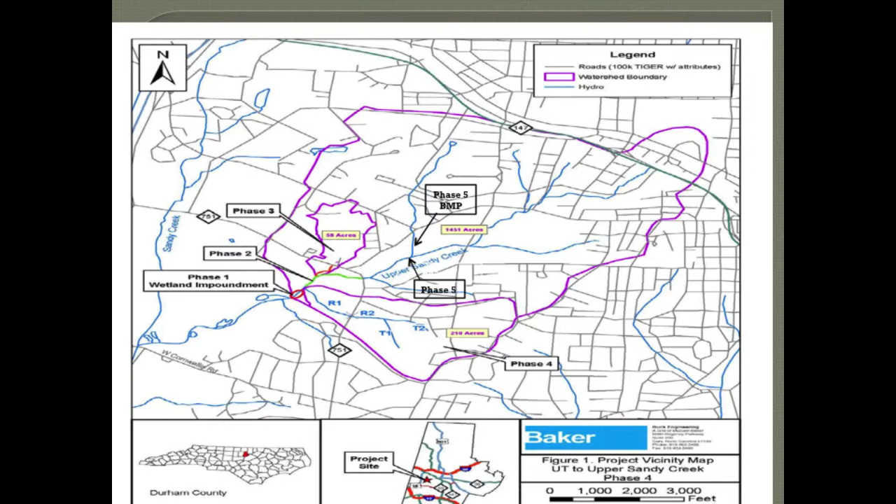Here's just an overview of the 5 phases quickly, and again, I won't go into them in depth, but phase 1 consists of some stream restoration. Phase 2 is going to be our wetland pond. Phase 3 is the wetland cells. Phase 4 has 2 reaches to it, Reach 1 and Reach 2, and both of those are stream restoration, with Reach 1 having a special anabranching approach to it, which you'll learn about later, of course. And then Phase 5, which we have the design and permitting, and we're waiting on construction funds.

Here is a shot of the head of Sandy Creek, and you would think by the size of this we have a lot of water coming through there. Now, Kurt, have you ever seen those flow full by any chance, or a hurricane that flowed full? Well, you can imagine the amount of water that's coming out through there. These guys wouldn't be here if that was the case, but anyway, that's a lot of water, and most of it is coming from the city of Durham, and not necessarily Duke University-owned property.

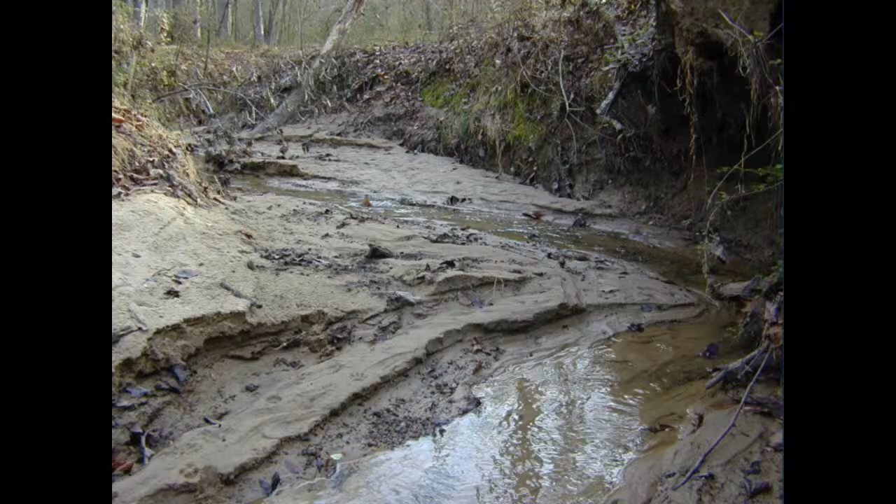Here you see a pre-construction. We have a lot of deposition of sand. You see the stream trying to heal itself, but incised channels, and this is probably a lesser of what we've seen in the worst case scenario on this project.

Phase 1, like I said, was stream restoration, and also they restored some wetland. Here's a list of some of the partners and the cost. You can see the cost for phase 1 and phase 2, and I'll talk about phase 2 in just a minute. We had some macroinvertebrate study completed. USDA Natural Resources Conservation Service provided some funding for some plant material, and then of course monitoring.

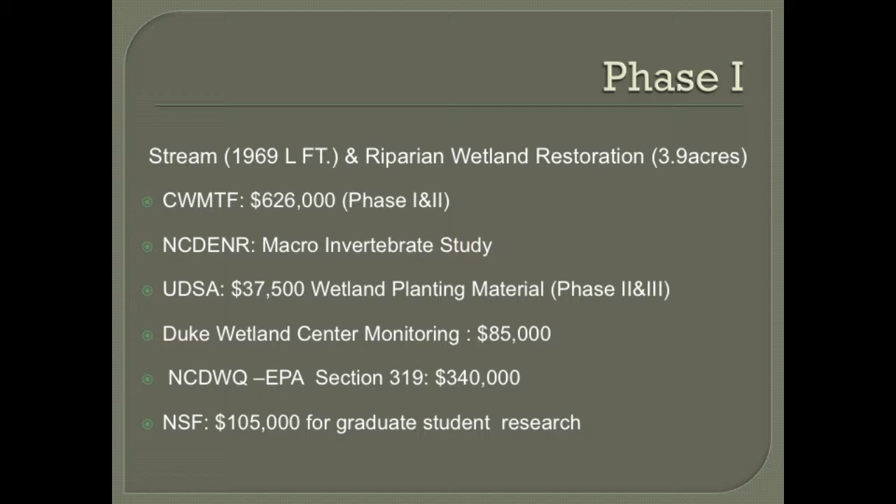You'll find on this particular project, these are actual data numbers that they're going to give you during this, and I think those are worth a lot in terms of taking something away from this course. But then you also see some research for graduate students, and that's something Curtis does well, is he plugs the students into the project to where they have ownership of it.

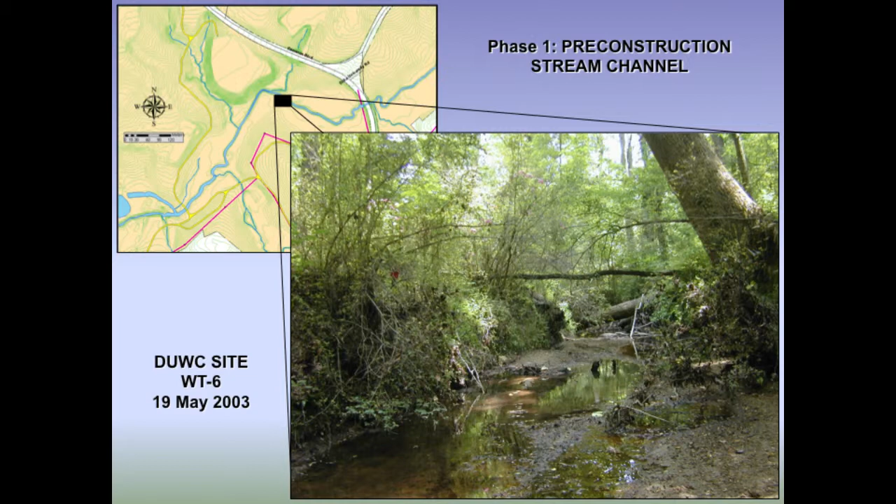Phase 1, here's the location of it again, just off of 751, for those of you familiar with Durham. Here's more of a sight of what we're used to seeing throughout, incised, no sinuosity, but there's just a good example of what we've seen pre-construction.

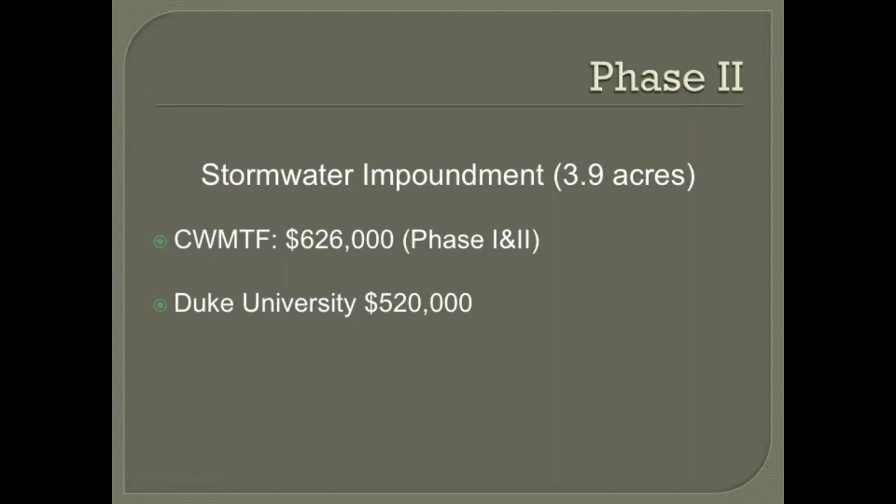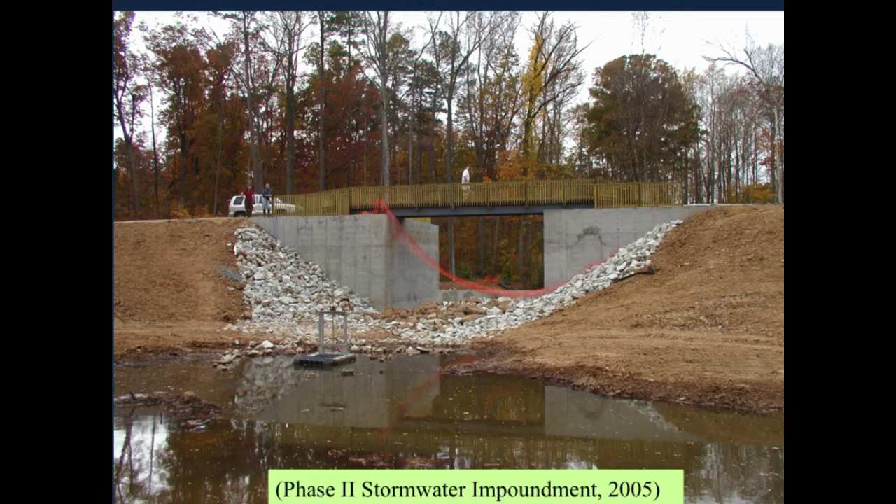Phase 2 is a stormwater impoundment pond. There's some cost of it. It's about 3.9 acres, and they have the ability to raise and lower the water level. The thing I see that is utilizing it, you see a lot of wildlife out there. You see a lot of plant materials that you wouldn't normally see. But most of all, we hear a lot of good comments from the people who use it as a path. You know, they jog right across this trail and/or the bridge, and they utilize that to its fullest.

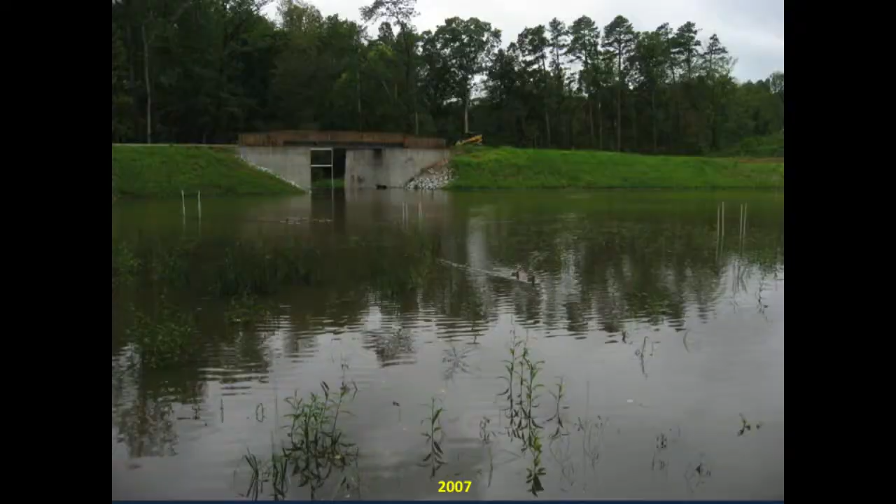Here's another view, and I think you have some ducks there in the front. These pictures don't do them justice, and of course when we go out there, you'll see what I'm talking about.

Phase 3 is the 6 offline cells that were installed. And this is actually capturing the water from Wallace Wade Stadium and Cameron Indoor, where they play their sports over there, and treating it with different vegetations in the cells. Division of Water Resources was a nice sponsor in this project, and then of course Duke University. And we had money left over again from the USDA for the plant material.

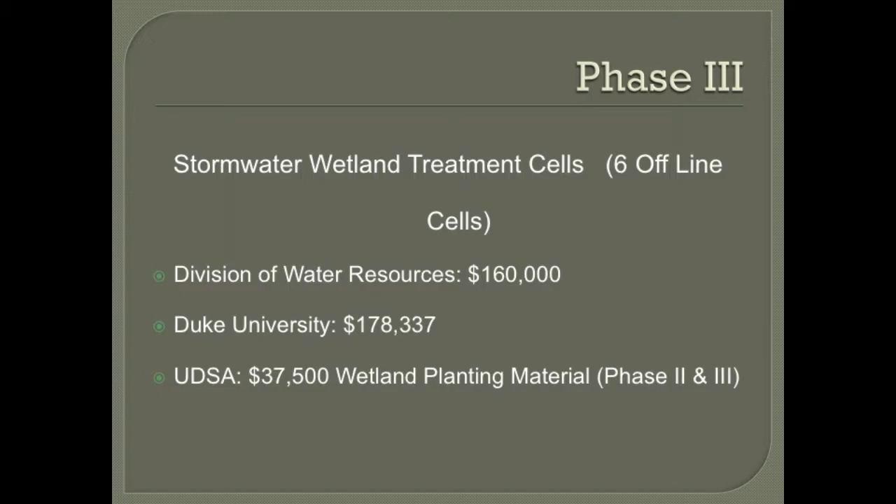Here's a shot of Phase 3. The channel actually runs straight down here, and then on both sides we have a series of 3 cells, and you have a flume at the top and a flume down at the bottom. And then of course, again, a lot of monitoring is going on during this particular phase.

Okay, Phase 4, Reach 1. We actually put Phase 4, Reach 2 in first because of the obvious. It's at the top of the hill. And then we followed back up with Reach 1, which was about 1,561 feet. Just total, it was priority 1 where we created the new channel. And you know, it looks real good now.

Okay, here's a Duke grad student who's giving us a perspective shot down in the channel. Again, this is pretty much typical of the way the whole upper Sandy Creek reach looked at one time, but I think we're about to eradicate this view here.

So you go down in that stream, you stand in? Yes, sir. Do you find the horizon or original watershed level that used to be there, or did this stream used to flow over all this, the extra water from the city coming down?

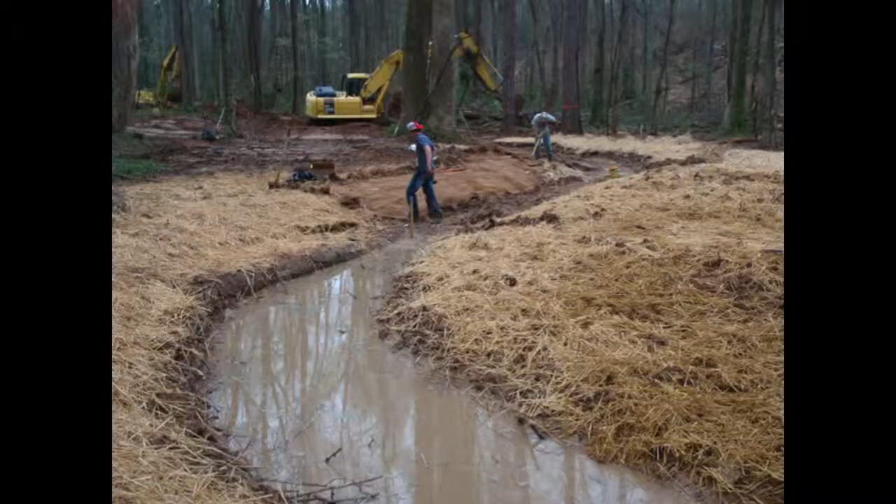All right, well, here's a shot of the finished product recently, right after it was done. Of course, it doesn't look this way now because we have a lot more vegetation. But you see the new channel that was constructed. And the thing that amazes me is when you go out there and look at these sites, you originally see these great big channels. I mean, basically scars in the land.

And then when the engineers get through designing, usually you think an engineer over designs, but usually this is about the size they come up with. But I think the reason is you want the water to get up out of the channel onto this floodplain, so it'll dissipate and drop out some of the sediment and so forth.

Okay, during Reach 1, once we completed it, there was also another grant that was received through Clean Water Management Trust Fund, and this was an innovative stormwater grant. And Kurt had come up with an anabranching effect, and that's where he's taking the water and basically forcing it out onto the floodplain area. And of course he has wells and all that, and again, he'll get into that monitoring detail a little bit later.

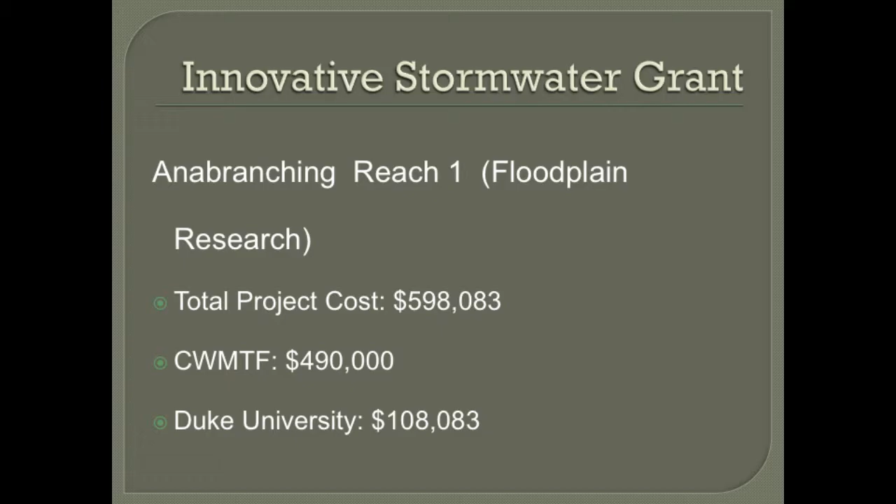Here is Neil down in the mud getting dirty, but he's right here at the anabranching. This is where they're putting a flume in here to divert the water from the main channel onto the floodplain, and then back down here where it goes back into the main channel. But again, this will be gone over and you'll see it out in the field for yourself.

Here's the side of the finished product. You see some of these monitoring wells, and I think they're at different depths, and Kurt will go over that. But again, it's grown up a little bit from this, but that's the way it should look. You want a good buffer zone, and we were able to use a lot of the trees in the structures of the stream, which of course gives it the natural look. Not to mention, it saves a few dollars.

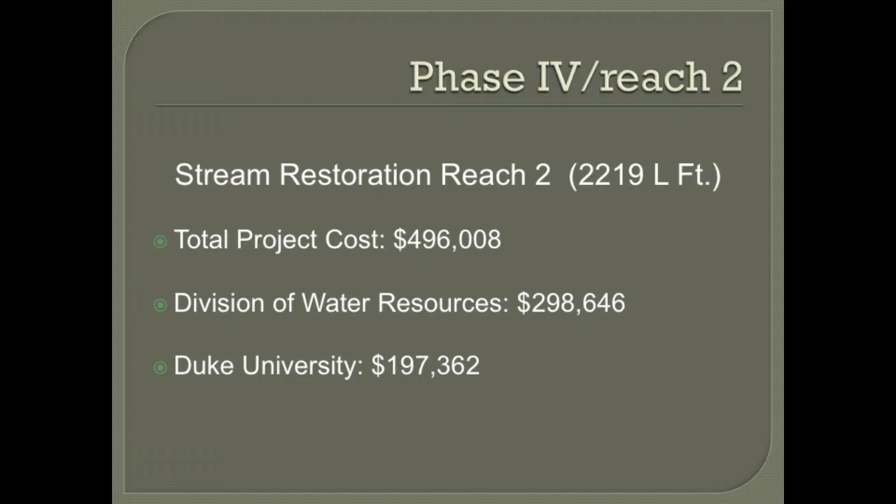Okay, phase 4, Reach 2. Again, more stream restoration, more funds from the Division of Water Resources. Duke University, of course, is always pitching in with monitoring. And our department, we administer all these grants.

And Lisa does a good job, because you've got grants where Duke University is donating in-kind match, but then you've got other issues where they're actually collecting revenue. Then you've got your engineer, then you've got your contractor, so it gets a little confusing at times, but it takes all these sponsors to put these projects on the ground.

Okay, here's a finished picture of Reach 2 on phase 4. Again, recently done. They look nice when they're recently done, and I find if you're going to take elected officials out there, that's the time to take them, because they don't understand the beauty of it being grown up like a lot of people. But if you're ever going to do tours, shortly after you complete it is when to do it, because they can actually see the structures in there, and you're more apt to get them down near the project.

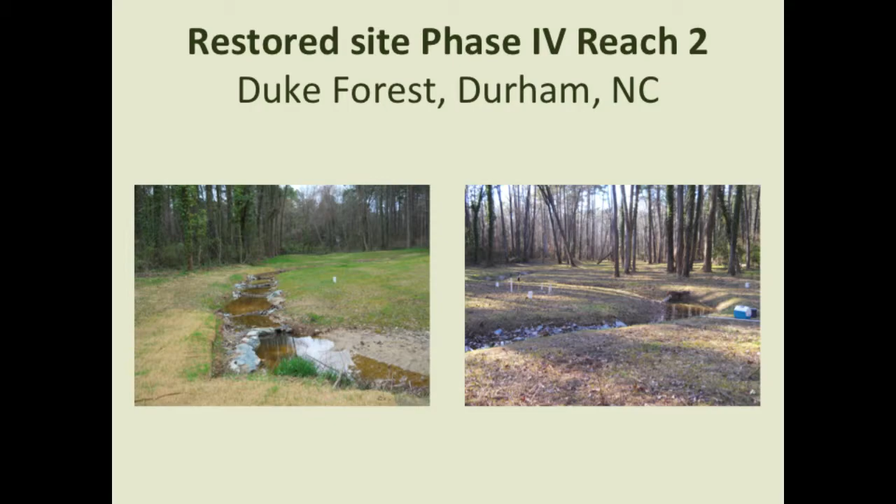All right, here we are just kind of looking over the situation. I think we had to do a little bit of corrective action, and that's going to happen. And thank goodness for those contingency funds and those grants. Sometimes we need them during blowouts and stuff.

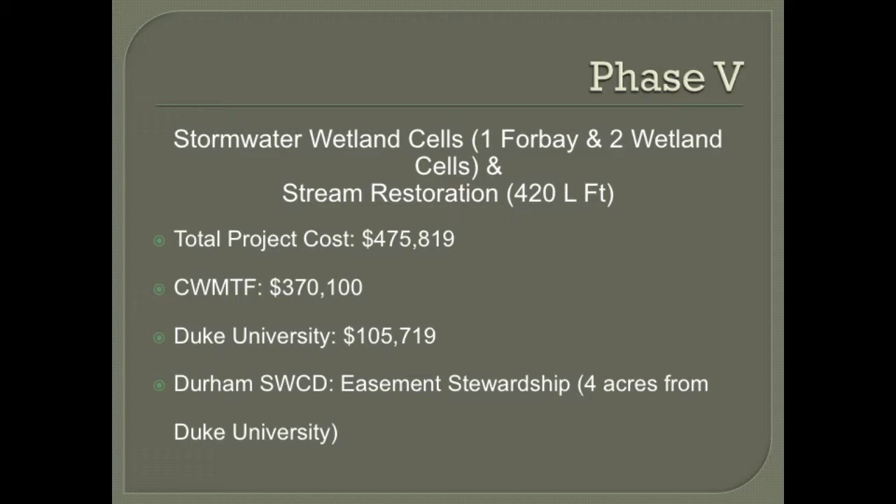Okay, phase 5, and this is our final phase, and once this is completed, we'll have approximately 1,365 acres under BMP treatment. I hope Kurt brought that slide where it shows the 18 different samples you took from the start to the finish. That's an outstanding slide. You'll see the difference. But we've already received the funds. This is actually a part of phase 5.

This is where we installed some wetland cells, a forebay and 2 cells, to actually capture the water off a parking lot. And this is actually part of Durham County's strategic plan. They have bought into the restoration projects that we're doing here in our department, and this was actually one of them. And here's another unique thing.

Duke University is not crazy about letting other entities monitor easements, but Curtis, being on the district board and having a good relationship with the president, was able to talk Duke University into it being okay for the soil and water district. And if you're going to monitor an easement, one like this is definitely one to monitor, because not only are we watching it, we were out there the other day and a neighbor or two came down wanting to know what we were doing, so we've got other people monitoring it too that we don't even have to pay. These are the types of easements that you want to monitor.

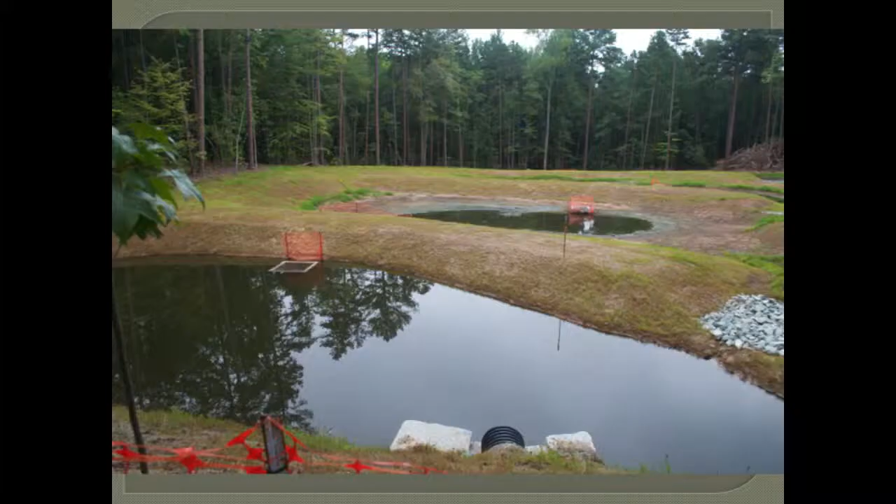This is the part of phase 5 we just completed, where you have your forebay right here. This is the pipe, and it really comes out of there when it's raining. I expect yesterday it was coming out full force. This is your forebay, which spills over into your 2 wetland cells, and then behind there we installed about 400 feet of stream restoration. Here's another shot of the same site.

Turned out really well. Okay, phase 6, and this is the one that we're trying to get funded now. We have the design and permits in hand, about $250,000 worth. Duke University has again agreed to donate I think it's around 7 acres to a conservation easement. We have received approval from Clean Water for about $400,000 for construction, but the funds are pending at this point in time.

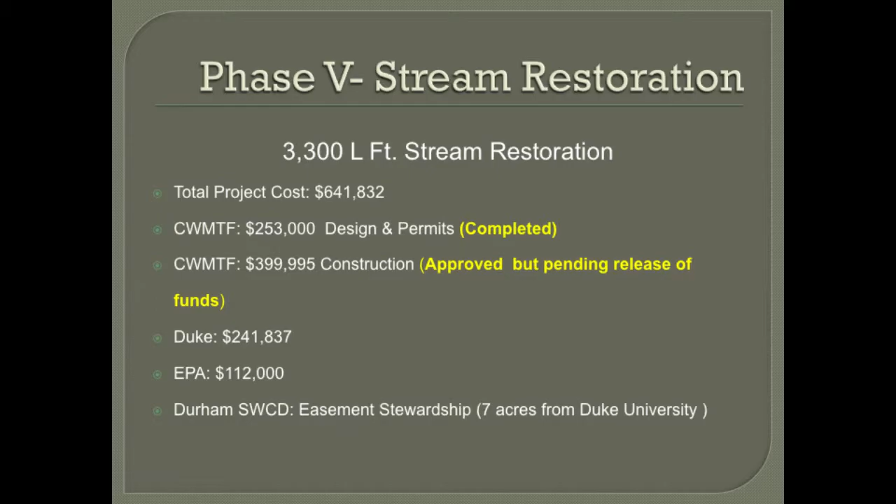Duke University, I think they actually had an in-kind match of about 38% on this particular project. EPA's funds are being used to do the monitoring and the study, and all those numbers are in your material. So again, partnerships, that's what it takes to get all these on the ground.

And by being here today, you guys are actually partners, because one of our goals and one of our grants was to conduct workshops, not only with resource people like yourself, but also with legislative officials, local officials, in hope that they'll see the importance of these projects and put more funding toward them, because we know some of our granting entities are drying up, so we need to keep those funded so we can continue to do these types of jobs.

Does the EPA have a grant program specifically that you can make application to? Yes, the EPA 319 grant, which is due May the 23rd. It's kind of short notice, but they do have a grant that can be used for stream restoration. It's usually through your state; the EPA provides money to states. Right. And then you get the money to work on a local project. Right. North Carolina received, I think, $1.3 million. I'm sure it varies from state to state, but that's the total that they have.

Well, that was my commercial kind of leading into this great workshop, and I think you're going to find it